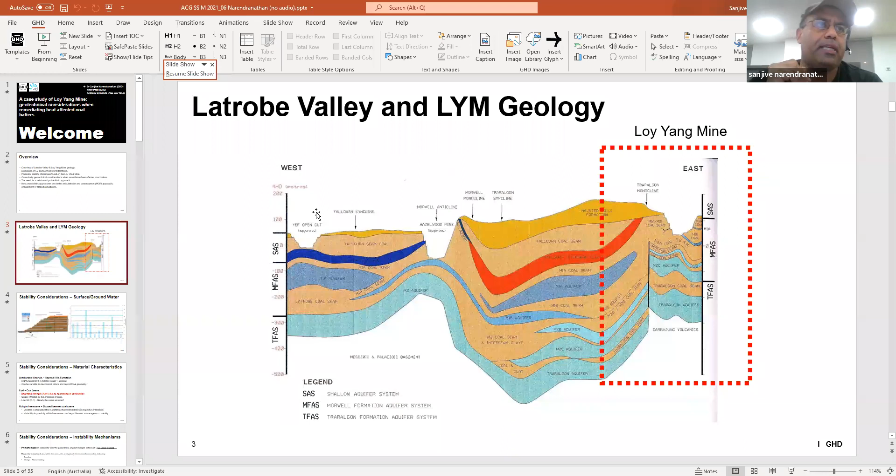Now, one of the things that's probably quite obvious at face value is the Loy Yang mine on the right. Unlike the Morwell open cut, the Hazelwood mine, or the Yallourn open cut, it runs through multiple seams, and it's all below the groundwater table. So the fact that we've got multiple interseams that we have to contend with from a stability perspective - and I'll touch on shortly how the interseams control stability, as well as what the aquifer conditions also do from an underlying perspective, and how the pressures need to be controlled. I'll touch on the failure mechanics very shortly, but the Loy Yang mine does have a lot of complexity associated with it, and that ultimately governs the failure mechanics of our critical mechanism.

Now, the way stability is controlled within the mines, or rather the destabilizing forces that we have to contend with - I'll touch on the first one: aquifer uplift. If the aquifer uplift exceeds the capacity, or the weight from the mine floor sitting above it, it heaves the floor, sends it into tension, and ultimately removes any confinement at the toe, thereby enabling the entire block to move.

The other potential destabilizing force is the actual hydrostatic pressures within the coal joints. There's a series of subvertical and subhorizontal joints. The subvertical joints basically become potential avenues for surface water ingress, which creates a phreatic gradient within the coal itself, which ultimately acts to potentially push the block out.

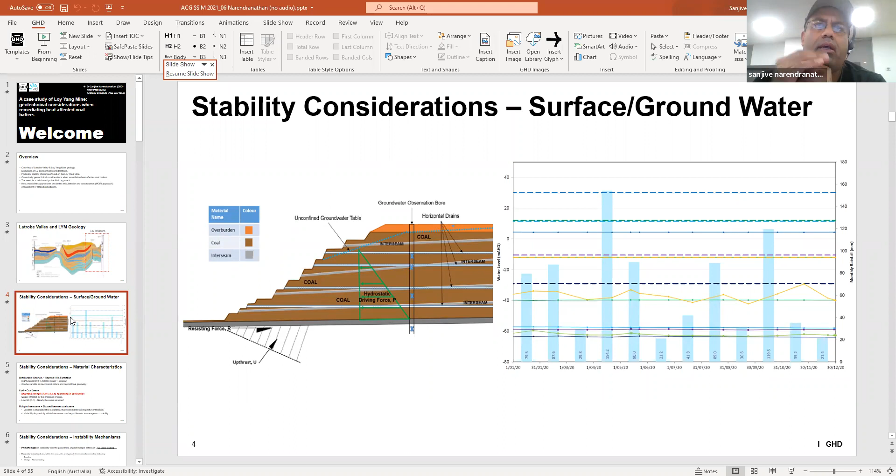Otherwise our destabilizing forces will exceed the capacity of the system, i.e. will overcome the shear strength of the interseams itself and push the blocks out. So getting that balance is quite important, and that does have a bearing on the stability as well. So that's the coal blocks, that's the coal seams.

Sitting atop of the coal seams, you do have an overburden layer, which is referred to as the Haunted Hills Formation. That's quite a dispersive material, sort of Emerson class 1, 2 type material, highly dispersive, and that does pose secondary considerations in terms of stability. Things like your circular failures do come into play, and I will also touch on what happens to the coal seams when they're subjected to heat sources, a lot of which naturally occur as a result of geochemical reactions.

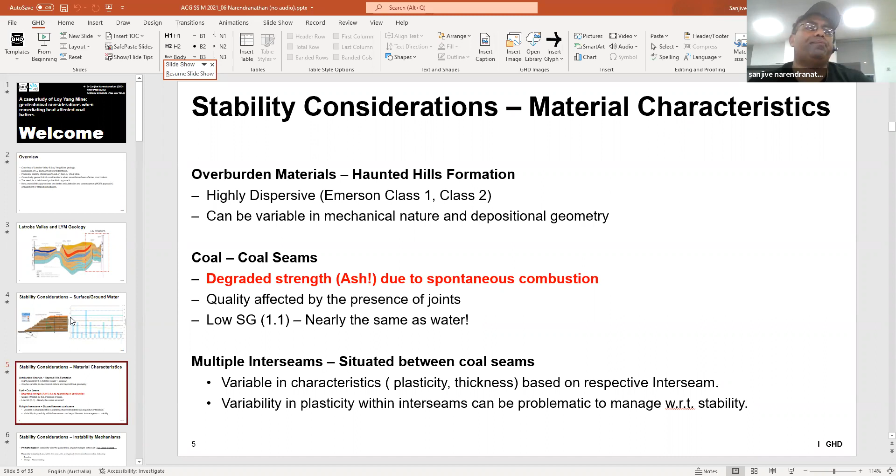The coal itself, which is already quite a light material, effectively turns to ash. So those are some of the things that come into play.

I did touch on the primary instability mechanism being the coal block sliding mechanism. So the importance of maintaining coal water gradients, so maintaining your hydrostatic forces as well as your aquifer uplift. Those two elements are very important within the scheme of things.

But you do have a series of secondary instability mechanisms that come into play, what's referred to as kinematically controlled mechanisms, which are usually restricted to the coal layer, the coal seams, and they occur as a result of the geological features within it, so the joints, the bedding planes, and so on.

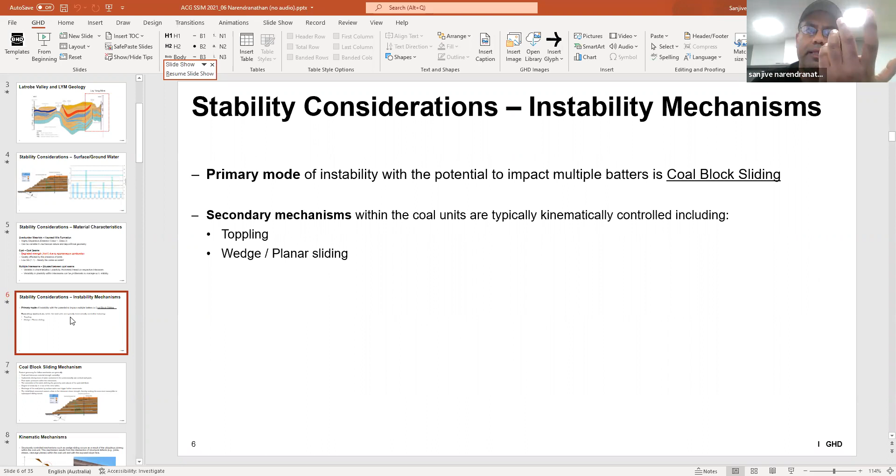So they can result in toppling failures where you've got subvertical joints. It can also get tetrahedral wedge failures where you've got intersecting joint sets, essentially providing daylighting in a slope face, providing an opportunity for large lumps or blocks of coal to fall out, but they occur purely within the coal.

Now, how do we control within the primary mechanism, the coal block sliding mechanism? The way we really control it are two key destabilizing forces, which are the hydrostatic forces within our subvertical joints.

That's usually via a series of horizontal drains to intersect the coal joints, the vertical coal joints, to drain the water level within them and to ultimately drop the gradient. So that's how we manage the coal water gradient.

And the hydrostatic forces are the ones that really, on a day-to-day, week-to-week, month-to-month basis, particularly with any seasonal rainfall events and so on, those are the ones that really cause us the most challenges, the most problems, because anything more than a 10 to 15 mil rain event would probably charge those coal joints to a point where it can start pushing blocks out.

The aquifer pressures, the underlying aquifer pressures, they're usually controlled by a series of redundant depressurization bores. So that's a system that we can actually engineer with some level of redundancy in there. And in some ways, whilst it is a very critical mechanism, and if left untreated, it can naturally heave the floor and cause quite a large scale instability mechanism, it is at least something that we have the ability to control with the benefit of redundancy.

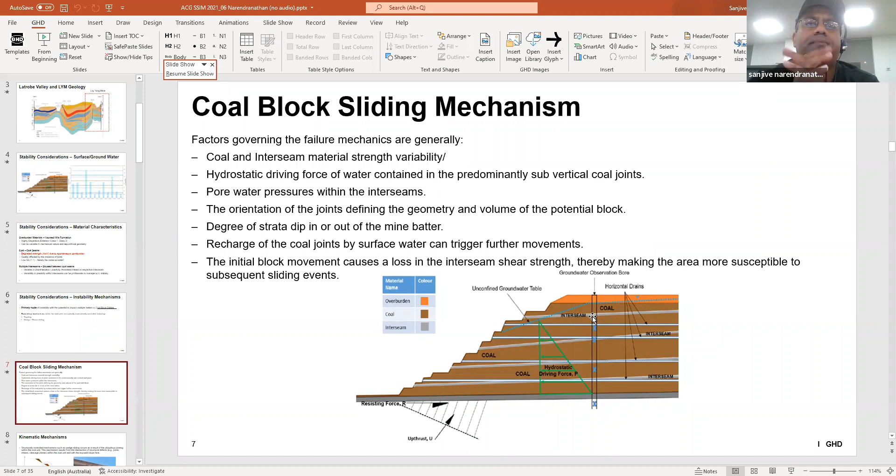It's a little more reactive on the surface water side of things, particularly managing your coal water gradients, because you are reliant on the joints being charged up to a point where they intersect the horizontal drains to actually dissipate any water. So it is very much a reactive management system, but they both go hand in hand.

But typically, given the limited persistence of these joints within a coal batter, they barely affect a complete slope, so what's referred to as the global slope. They typically are restricted to a bench scale, so 1 or 2 bench scales, because they barely have continuity beyond 10 or 20 meters, that's the joint length.

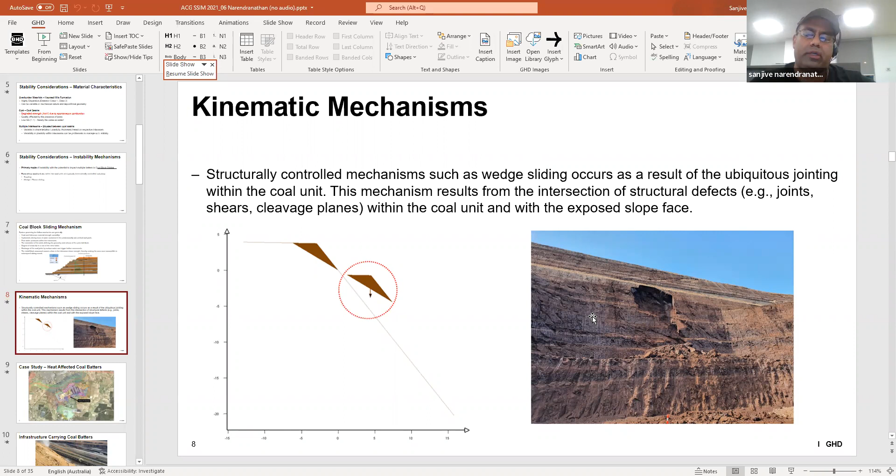Okay, so that's just a little bit of background on some of the geology, how the geology impacts the stability and the potential failure mechanics of a potential block slide, or indeed a secondary mechanism, the kinematic mechanisms, just generally speaking in the Latrobe Valley.

Now, I'm not a geochemist. However, there is a particular reason owing to the mineralogy within the coal within this particular area, and also the presence of particular and persistent joint sets which have the ability to aerate and oxidate the coal within that area. It does from time to time, every couple of years, it does catch fire.

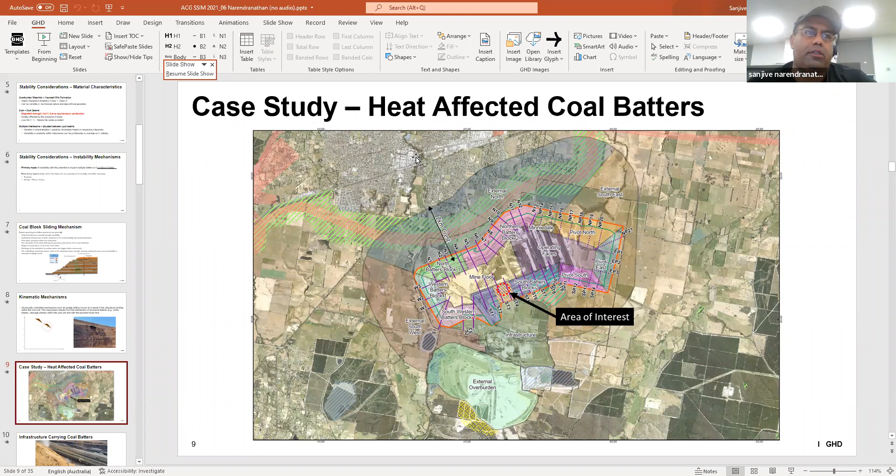And that then poses a real issue to this particular domain, because this domain - and I've just included a picture here which shows a more close-up view of the southern batters of Loy Yang - it does host all the critical infrastructure that carries the coal from the face essentially to the raw coal bunker, which ultimately gets into the power station for the purposes of burning.

Now, there is a unique element with brown coal as well. Unlike black coal, which does have a relatively good shelf life, as in you can build up stockpiles of it so that you never find yourself in a shortage of the material - you can build up quite substantial stockpiles next to your power station and periodically burn it, even if you have issues within your mine that might affect supply.

Brown coal is quite a unique beast because it only has a shelf life of about 48 hours. That was something I never appreciated till I started working in the Latrobe Valley with brown coal. So a lot of times I hear from people, well, why don't you just build up more supplies or stockpiles of coal? So should you have an issue on your mine, a stability issue and so on that might affect production, you can always chew through your stockpiles. But in this case, the material is basically unusable after 48 hours. So the concept of building up stockpiles, while prudent, is actually not applicable in this particular area.

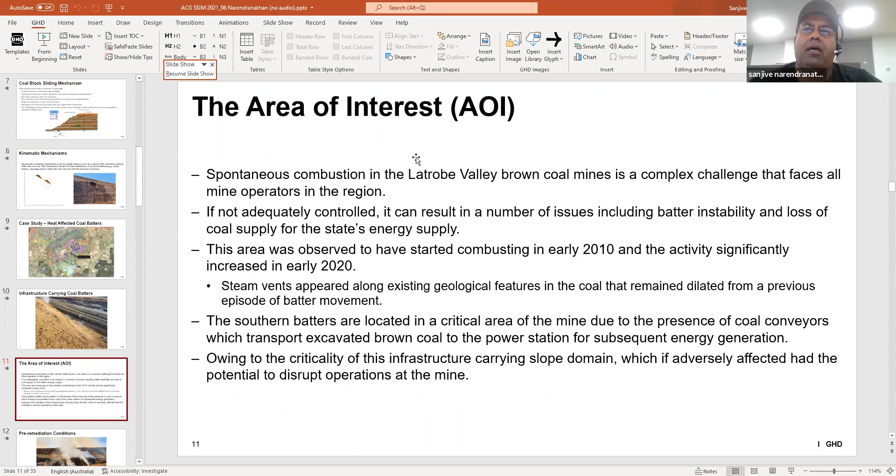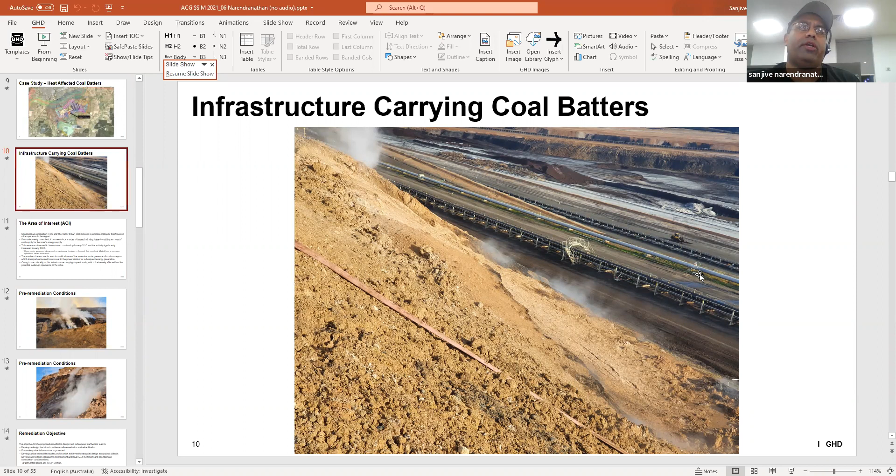Now, here's a photo of what it looked like and what was happening when this event occurred in 2020. What I'm touching on here is what we were confronted with back in 2020, two years ago, when this particular area of the mine, which was carrying and hosting a lot of the critical infrastructure, was the subject of a lot of scrutiny from the mining regulator, because the mining regulator is under a lot of pressure from the energy minister to make sure that supply from this particular mine is not affected by any unforeseen stability issues.

Because ultimately this particular mine supplies over 60% of the state's power supply, when this particular event did occur, noting that it did occur on a critical domain within the mine, there was a lot of scrutiny around how this was going to be managed, remediated and maintained, all while supply wasn't being affected.

Now, the company, which is AGL, they were very - they'd given us terms of reference, I guess, as their consultants, to make sure we came up with a design to achieve a safe and stable rehabilitation outcome. Obviously, they wanted the key infrastructure, which is the conveyors, protected. It was quite unfeasible to relocate it.

At that particular point in time, for that particular domain, it was also very important that the final remediation profile adhered to what's referred to as industry best practice criteria, which I'll touch on shortly, and make sure that whatever remediation objectives are put forward now and whatever is implemented can ultimately be sustainable in the long term, without repercussions down the track.

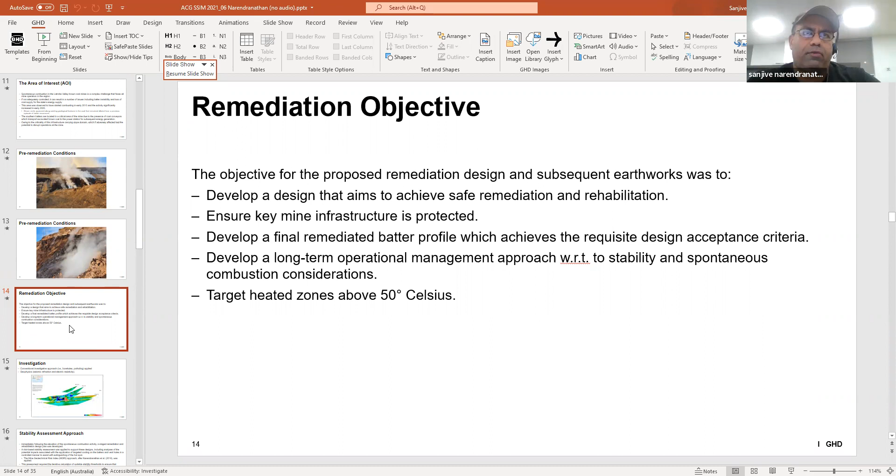So from that perspective, we really had to launch into an investigation to work out what was happening. We saw the surface expression of what the spontaneous combustion looked like. On the surface, you might see a little bit of coal, and some of it might have turned to ash. But deeper within the slope, there was essentially a fire, an inferno, burning with temperatures exceeding 400 degrees Celsius.

So we had to actually come up with a way of mapping out what was going on down below, working out what areas were actually affected. It was important that we understood what the heating process actually did to the mechanical conditions of the material. If it's partially heat affected, some of the interseam materials will get baked and become quite indurated and hard, whereas the coal turns to ash, and then you've got everything in between. So it was quite important that we delineated those zones.

So we used a series of geophysical techniques, because drilling holes into this material was not feasible. The very process of drilling further aerates the coal and provides an ingress point for oxygen, which further exacerbates the combustion. So it was very important that we did not exacerbate or provide further fuel to the fire. We came up with a non-intrusive way of investigating this particular site.

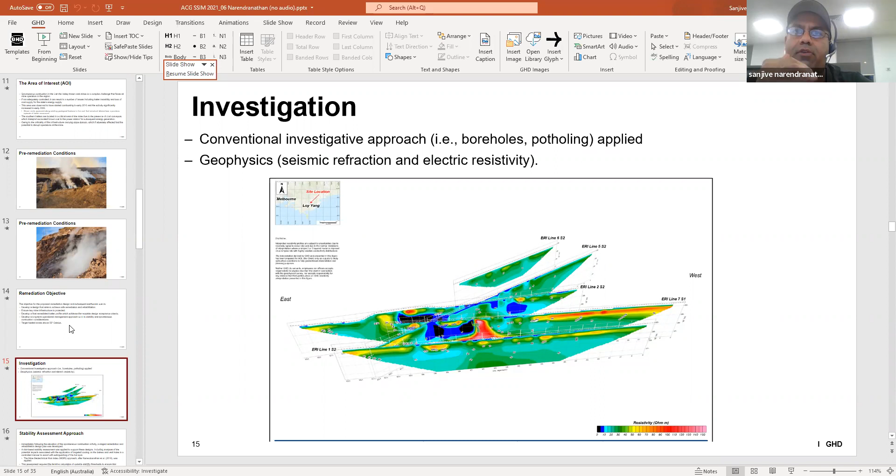So identifying those joints and smothering them, effectively starving them of oxygen, would at least control any potential further exacerbation of the heating or combustion. That's how we investigated it, delineated the area of interest, worked out what was going on down below, and determined the mechanical characteristics of materials which we weren't able to conventionally sample for obvious reasons.

Now doing the stability assessment was quite an interesting and challenging aspect, because we were dealing with a dynamic environment. In the context of heat-affected coal weathering, one of the things we had to do was obviously douse it periodically with water. Dousing these coal batters with water, whilst that does alleviate to some extent the spontaneous combustion element...

If you remember back a few minutes what I mentioned around surface water ingress into the subvertical joints, providing the elevation in hydrostatic pressures, which is one of the primary destabilizing forces, it enables us to appreciate that whilst the water's beneficial in mitigating the combustion, it actually provides another geotechnical risk because we're saturating and increasing the phreatic gradients within the coal itself.

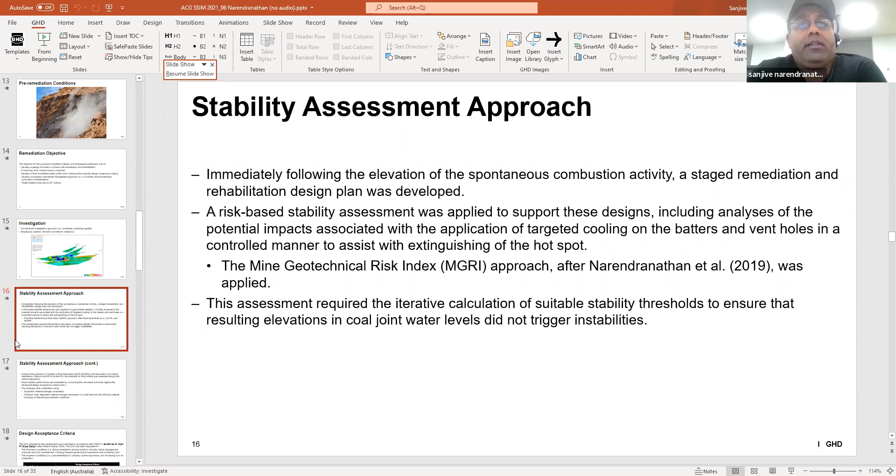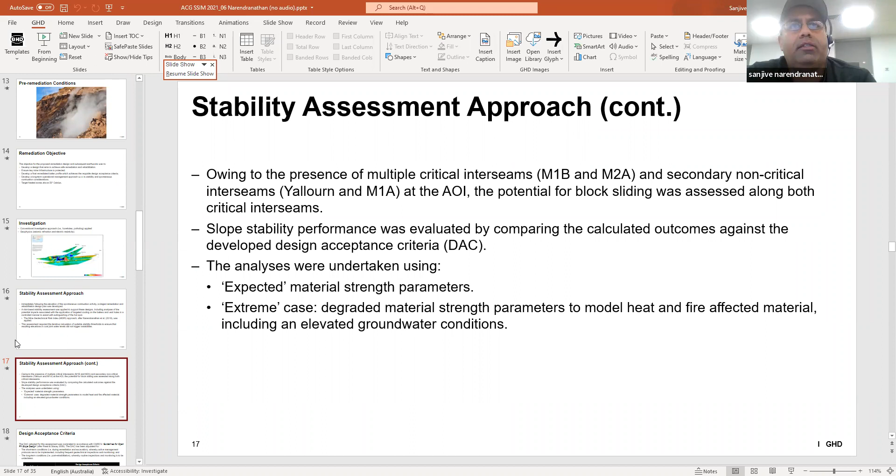So there's a paper I published a few years ago, which came out at the Australian Centre for Geomechanics 2019 risk conference, that deals with this approach. I'm conscious there aren't many geotechnical engineers in the audience, so I won't labor the technical elements, but functionally, what we did was look at the various parameters controlling the destabilizing and stabilizing forces within our system, looking at credible upper and lower bounds and throwing all of those into a stochastic model, ultimately doing a Monte Carlo simulation around various outcomes - upper bound groundwater gradients, lower bound strengths - bringing all of those together to look at how our factors of safety would vary across different conditions, and to work out a reliable range of factors of safety. That's the process we went with.

Within the context of mining geomechanics, particularly in Australia, North America, most of Europe and Asia, the generally espoused design acceptance criteria - colloquially referred to as the Read and Stacey criteria - is the CSIRO pit slope guidelines, which gives us a series of minimum criteria. It's like a design standard. So if you're designing a slope in a given serviceability context, this is the factor of safety and ultimately the probability of failure that you would have to adhere to.

The challenge for us was to essentially remediate this particular slope to get it up to a long-term factor of safety of 1.6, subsequent to remediation, which was the minimum requirement within the Latrobe Valley for any critical batter carrying critical infrastructure. That was a non-negotiable set in stone by the mining regulator, and very much a requirement.

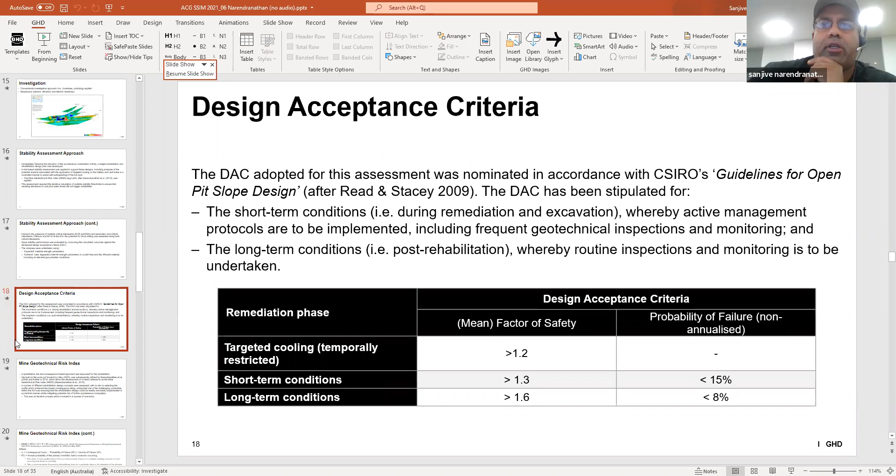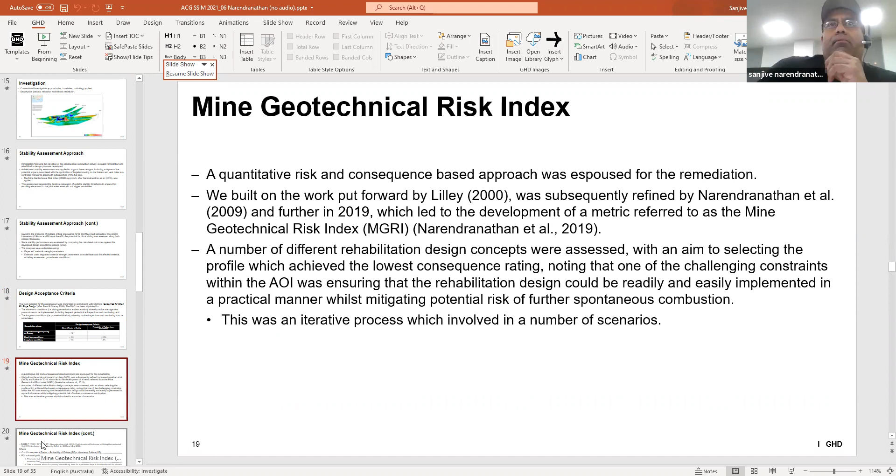However, during the process of remediation, there was acceptance that we would naturally fall below that particular factor of safety. As long as there was understanding around how far below that acceptance criteria it falls, and there were mechanisms and processes in place to manage the outcomes as a result of that, we were able to get it through the regulator.

Now, I won't go into all the ins and outs of the MGRI approach, but really that's a consequence assessment based on the likelihood of a particular event occurring. If anyone's interested, I'm happy to send you a copy, or it's available online - a free download from the Australian Centre for Geomechanics, the 2019 paper, which builds on work done by one of my former lecturers, Professor Peter Lilley, which looks at the likelihood of a particular event occurring, and that being compounded by another extreme event.

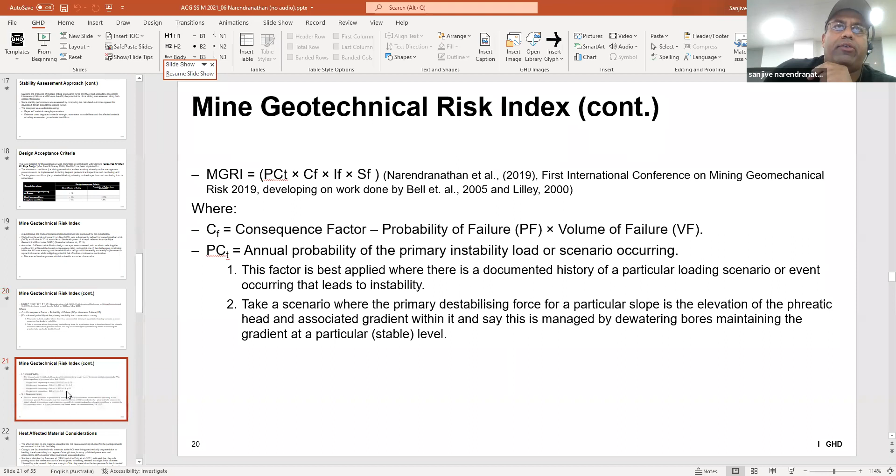So in the context of this particular slope scenario, what was the likelihood that we would encounter a joint that was significantly degraded, that also sat atop very low strength interseam material, and had a temporally elevated phreatic gradient? It looks at the likelihood of each of those occurring and what the return event on each would be, and then it rates a consequence factor at the end of it.

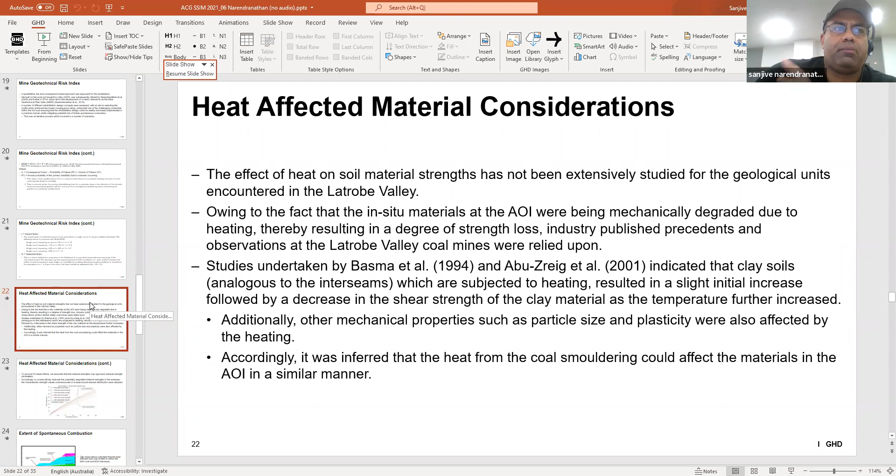So that's some of the approaches we undertook in this to work out what our upper bound and lower bound strengths were for the particular system we were dealing with across the multiple interseams within this particular area.

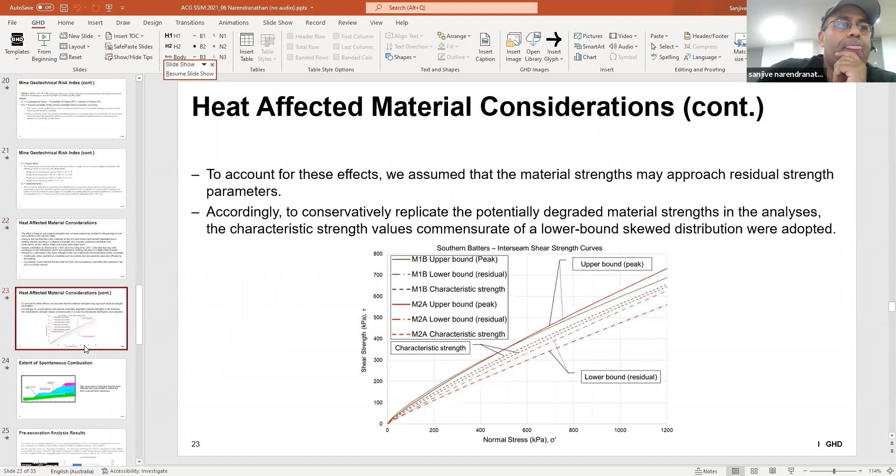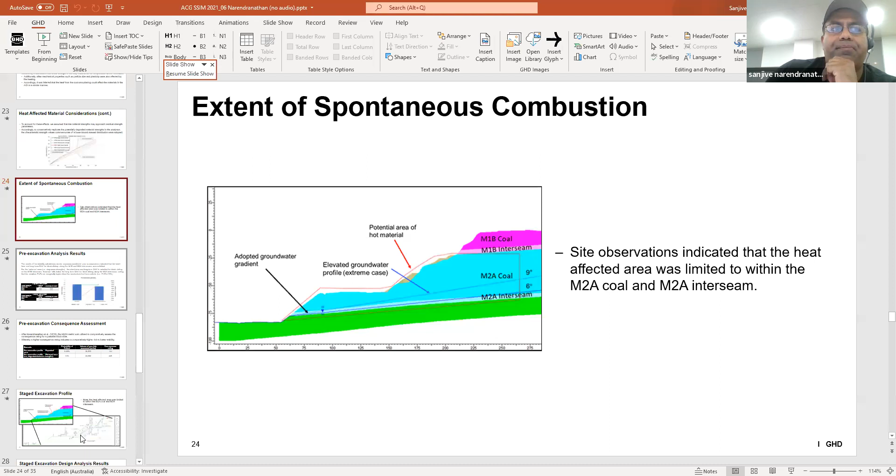But by removing that material, we're reducing the weight of the coal blocks, thereby reducing the shear strength mobilized along the basal interseam. So naturally, once we remove that material, we'll have a temporary drop in the factor of safety. But for the long-term conditions, we needed to bring that factor of safety back up to 1.6, so it was important that we reformed the slope with suitable material in a staged manner to ensure we got back to where we needed to be in terms of factor of safety.

So one of the things we were able to do as a result of that process is come up with a sequencing approach to how this remediation would be done. So we went with a top-down approach for the remediation.

Naturally, it would have been much easier from a mine production or earthworks perspective to start from the bottom and work our way up, as opposed to the other way around. However, starting from the bottom and working our way up would have probably released too much confinement at the toe prior to actually rebuilding the slope to invoke a sufficient degree of shear strength up dip of the critical area.

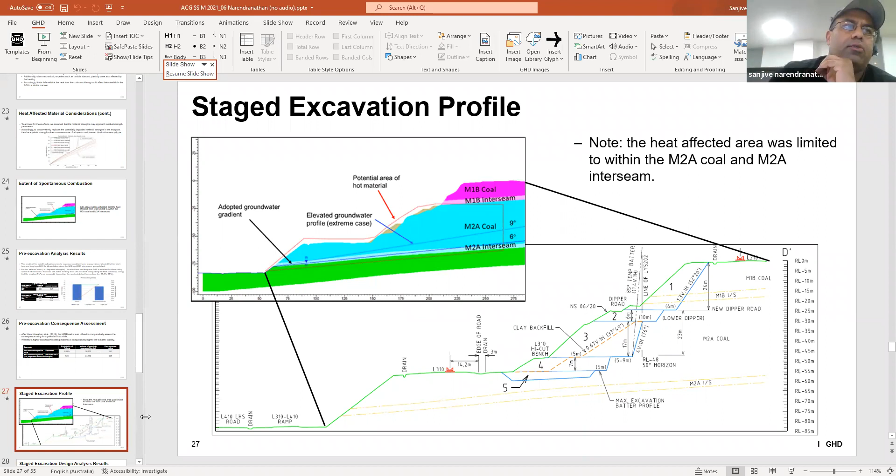So through the probabilistic process, we were able to test the respective outcomes across each of the excavation stages to work out what our critical groundwater levels were. At each stage, once we'd excavated the hot material from, say, stage 1, we could test our models to work out how much further we could push the phreatic gradients within the slope itself, so we could preemptively cool the second stage and the third stage and so on. That gave us a pretty good level of fine-grained resolution across each of the stages to really come up with the critical elements driving stability.

That was a very useful tool, noting that we had quite a few variables. We had the material strengths within the coal, within the interseam, as well as the hydrostatic conditions, all varying within the system.

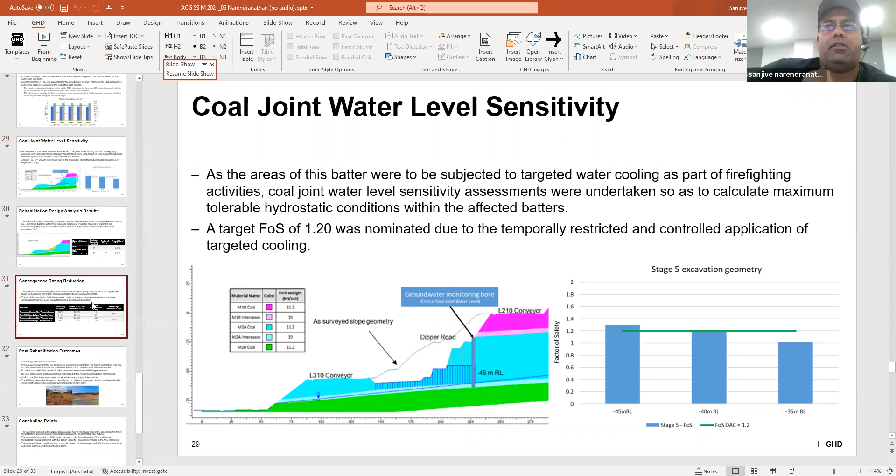All right, so that enabled us to undertake, or rather defend, the remediation plan that was put forward through this process, and really gave us a really good understanding of which stage was quite critical, which stage required careful consideration of tarps, careful consideration of critical groundwater levels, monitoring, and so on.

So this was a challenge which we would not have been able to do in a deterministic sense using singular or conventional stability calculations. We really had to look at the range.

The only way we were able to defend and justify this to the mining regulator, particularly during the remediation phase, where we ended up with fairly marginal factors of safety, was by noting that we felt we had a pretty good understanding of what the drivers were. Whilst the factors of safety were low, we felt we had a good idea of what the consequences of any potential movement were, and what the thresholds of the system within those confines were as well.

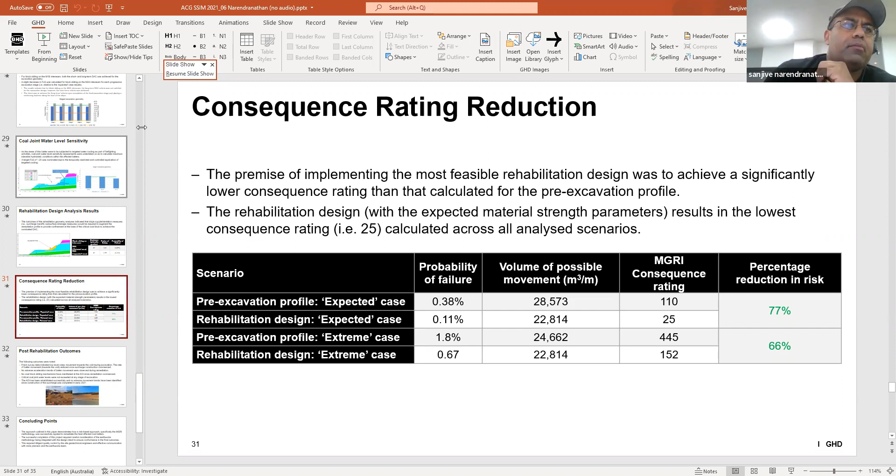It was certainly something I'd never dealt with in my career, and particularly at the Loy Yang mine, there were a number of people who had spent most of their careers there with 30, 35 plus years experience, who had, whilst they'd encountered spontaneous combustion in localized and isolated settings, not to this extent, nor this close to a critical matter. So this was certainly something quite unique, given the scale and location it occurred at within Loy Yang, and the level of scrutiny from the regulator on this one was quite high, as well as AEMO.

And for the Australians in the audience, that's the Australian Energy Market Operator. They're the ones who basically advise the federal government on the minimum reliability requirements - within Victoria, it's what the minimum production requirements are for power and things like that. So there was a lot of scrutiny, not only at the state level, but also at the federal level, on how this project turned out.

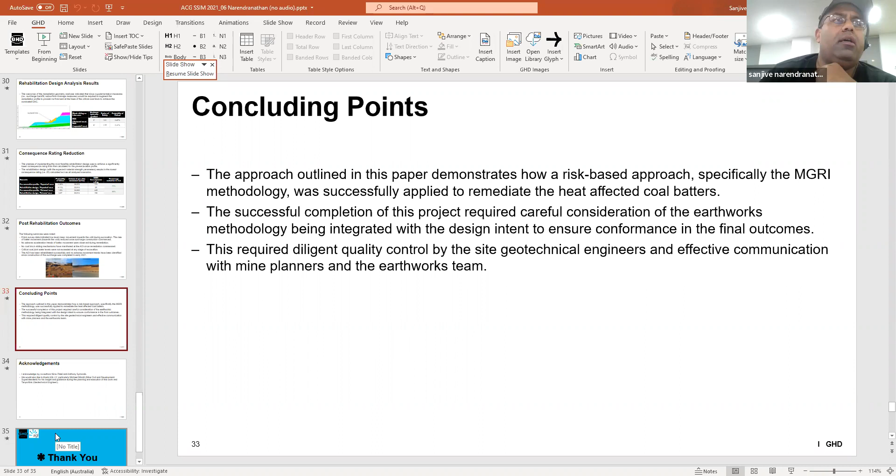So there's a whole piece around quality assurance and quality control. Now, thankfully, on this particular site, we did have a very good contractor, a very knowledgeable and experienced team was put forward to make sure everything was done to quite a high level, noting the scrutiny we had on this.

So look, that's the end of what I had to say. But if anyone's interested, the paper is available online through the repository with the Australian Centre for Geomechanics, and I had a lot of good help from my co-authors, Nirav Patel from GHD and also Anthony Symonds, as well as AGL, because our client AGL was very supportive in us doing this work and gave us a lot of latitude to investigate this. They also appreciated the nuances and the uniqueness of this particular situation we were bestowed with.

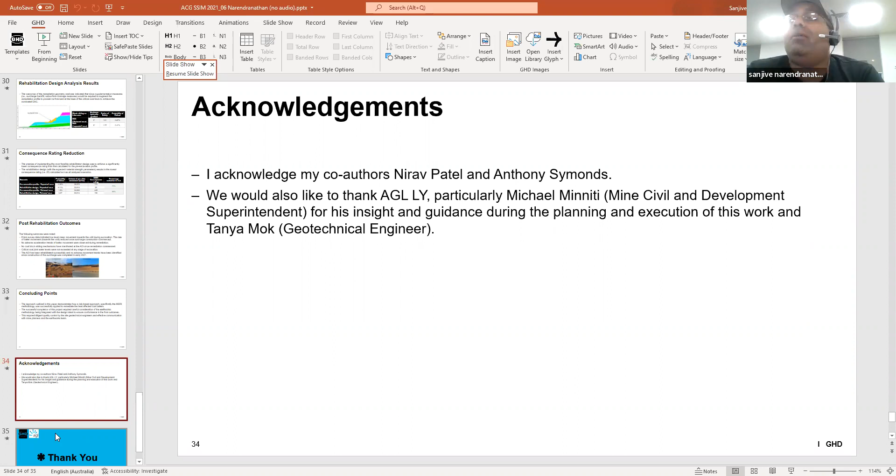So look, that's the end of my presentation. If I haven't put anyone to sleep, I'm happy to take questions.

Thank you, Sanjive. It's very interesting because we in Western Australia have less knowledge and exposure to coal, so it's a unique area for us as well, and there's a lot to learn. Before I open the floor for questions, I have a question of my own.

You said that there's a limited lifetime for brown coal, 48 hours. Could you please explain further on this?